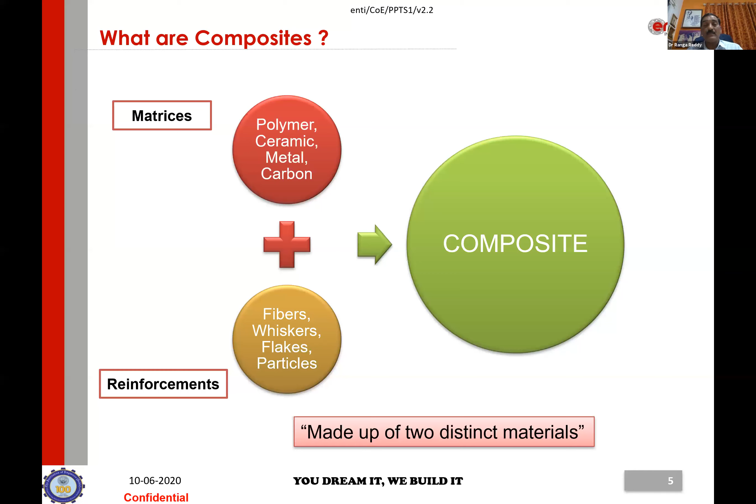What are composite materials? They are solid materials constituted by two or more distinct phases, and their physical properties are different and better than the individual material characteristics. A composite is designed to match high stiffness and brittleness with a tough but less stiff matrix, and it acquires high resistance to fracture and fatigue loads.

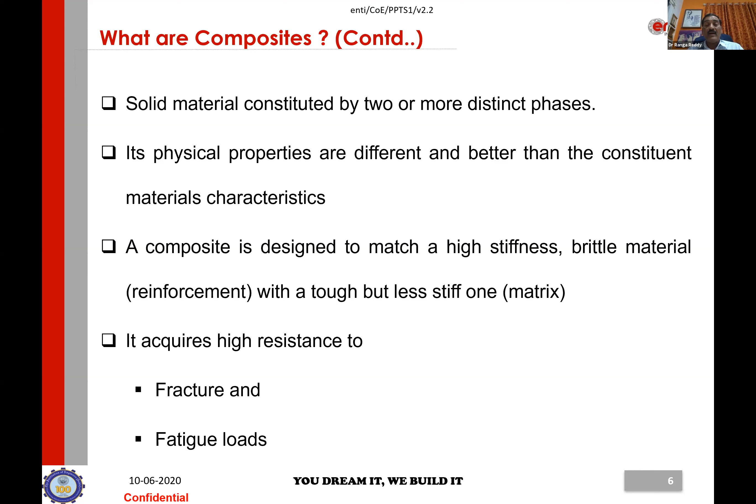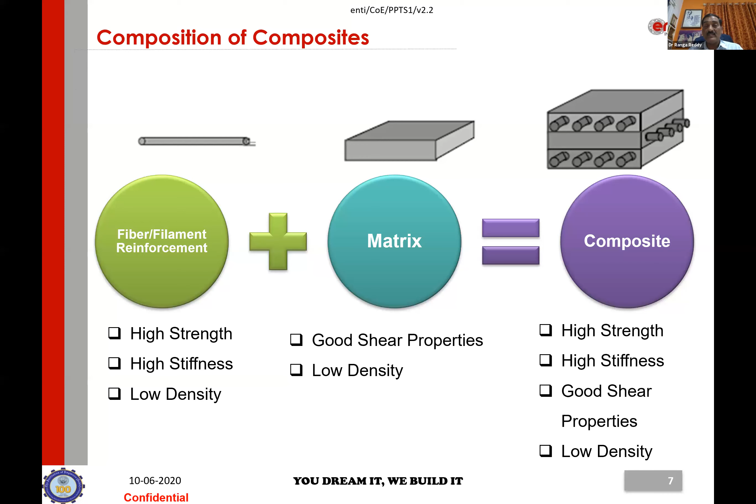Looking at the characteristics of the fiber — a filament reinforcement — it has high strength, high stiffness, and low density. The matrix has good shear properties and low density. When reinforcement and matrix are joined, you get a composite material with high strength, high stiffness, good shear properties, and very clearly, low density. This is one of the major advantages of composite materials, especially in the aerospace industry.

Why composites? These are used in different forms across so many industries and applications, in India and abroad. One major advantage is their tailorable physical properties, which are very distinctive for composites and not possible with ferrous or non-ferrous materials.

This is one reason designers are fond of designing products using composites—thermal management, heat transfer, and strength and stiffness at low densities. This is another advantage, especially for aerospace applications where weight matters a lot. Conductivity range is very low to many times that of copper, and thermal expansion is almost close to zero, covering a wide range of materials.

In composites we have polymeric, metallic, or ceramic, and carbon materials. The exploding potential of materials and applications is one advantage of composites. The primary advantage of composites over metals is that properties can vary with direction—this is another basic advantage, as properties can vary according to what the designer wants.

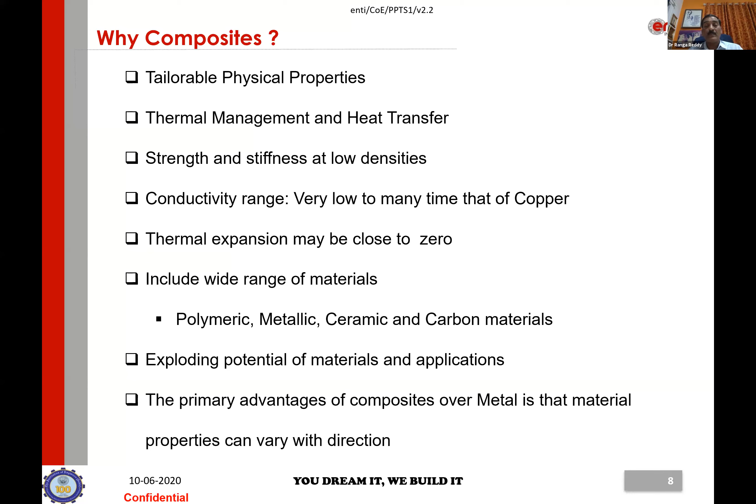Continuing on why composites: many structures have a primary load direction while other directions are less heavily loaded, but metals are isotropic. As our delegates and participants know, stiffness, strength, thermal expansion, and thermal conductivity are the same in all directions for metals. This is a key point where material properties at different directions vary in composites.

Composites are anisotropic, and the layups are tailored to provide as much strength as needed in whichever direction you want. The strength or stiffness in secondary load directions may not be the same as in the primary load directions.

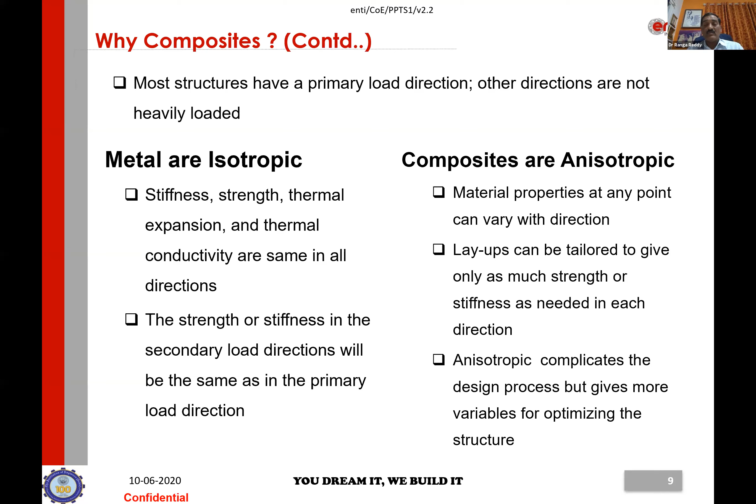As I said, being anisotropic complicates the design process but gives more variables for optimizing the structure. The benefits of composites are plenty—I've just recorded a few of the most prominent ones.

Better performance, lightweight—especially important in aerospace and space applications—lower energy consumption, fewer greenhouse gas emissions, extended life cycle, and improved constructability with low field installation cost, especially for composite parts, since the number of parts becomes much less when using different methods, especially in aerospace applications.

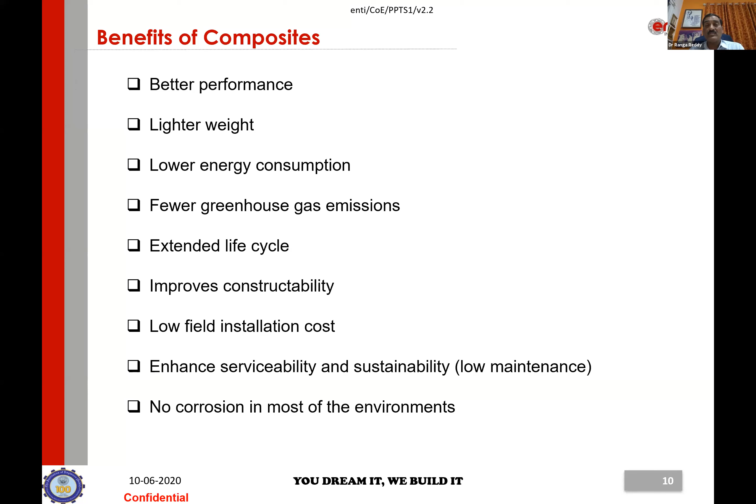Enhanced serviceability and sustainability—if you consider longer life, low maintenance cost, and no corrosion, these are very clear advantages, especially in marine applications. No corrosion is a very interesting and useful pattern for composite materials in most applications.

As I said, regarding the materials we are discussing, we will not go into full details of the subject because in 45 minutes we would like to give an overall view of the materials. Let me mention what is normally used in aerospace applications.

Normally, materials consist of a matrix. The matrix sets up the part geometrically, gives cohesion to the material. It is usually flexible and not very resistant, and it transmits efforts from one fiber to another. The reinforcement, as we have seen, provides rigidity and resistance.

The types of matrices are plenty; we've mentioned a few used in aerospace and other industry applications: metal matrix composite materials, ceramic matrix composite materials, and organic or polymeric reinforced plastic matrix composite materials.

Coming to fibers, the main fibers used in reinforcements are glass fibers, which form the largest part of applications in other industries including even some aerospace sectors. Carbon fibers are highly used, especially in high-temperature areas and aerospace applications. There are also boron fibers, ceramic fibers, and metal fibers.

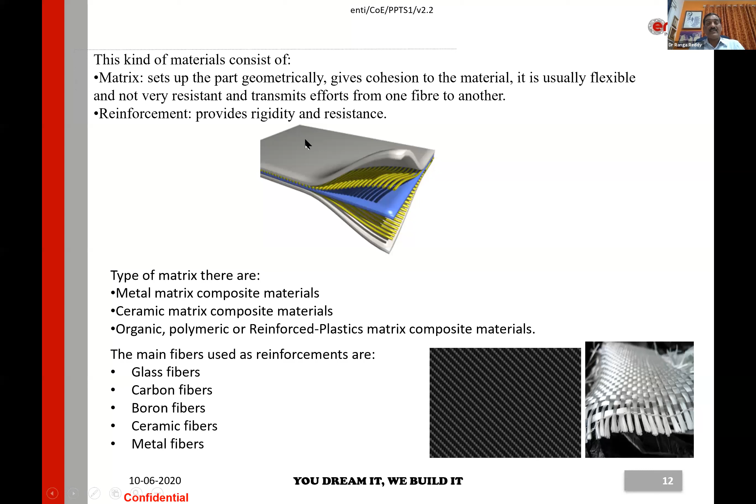Sharing of slide. Ramdas, I'm not able to move the slides. Try it, it's your control only. Yeah, I think I got it there.

Generally, most of the time when the usage of composites comes up, the cost of composites will be higher compared to other materials, especially in applications where it is required. But whenever we calculate the cost of any product or application, a total life cycle cost analysis has to be done. Then we can make the cost comparison with other materials.

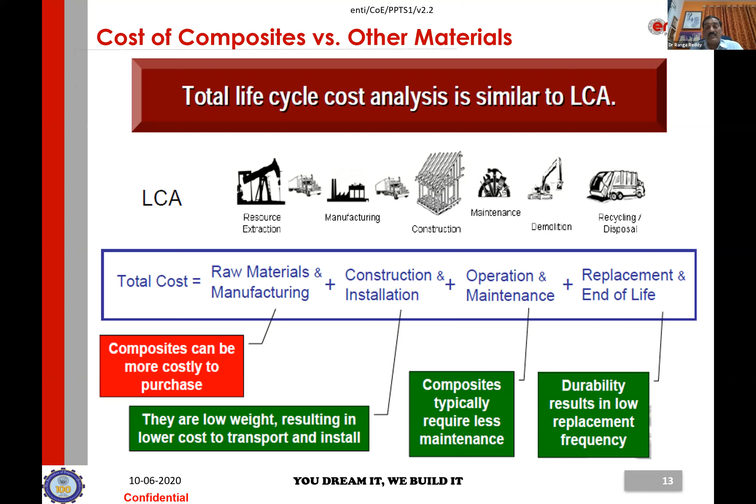If you take this total cost and compare composites normally, the only area where composites are more costly is raw materials and manufacturing cost, which is high compared to other materials. But for construction and installation, the low weight results in low cost to transport and install. Composites typically require less maintenance, and their durability results in low replacement frequency. This shows that composites are competitive in total life cycle cost compared to other materials used in aerospace applications.

This slide is to show the total application of composites manufacturing growth in India, from 2000 to 2020. If you take the world GDP, in 2000 the BRIC nations were around 11%.

Developed countries were around 89% of the GDP in 2000, and the BRICS nations' share of GDP grew to 40-60% over time. This is in comparison to composite production as well.

This gives a relativity that production of composites goes along with GDP growth. If you take BRIC nations, in 2000 we were producing only 19% of world composite production, and 81% was developed countries. BRIC stands for Brazil, Russia, India, and China - this is called developing countries, though maybe one country has already claimed developed status, but still all four are considered developing countries.

Now in 2020, BRIC nations' composite production has gone up to 37%, and developed countries' share has come down to 63%. This shows that developing nations overall have taken a strong role in global composites production, and further BRIC country increases are not a matter of whether it will happen, but when and how much. This shows clearly that developing countries, especially India, are catching up in usage of composite materials across different industries.

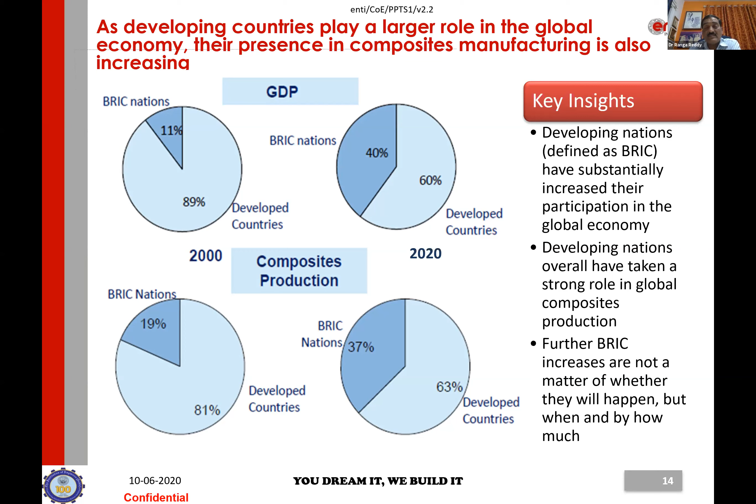This is the global demand for carbon fiber, taken from a magazine. It goes from almost 29,000 tons carbon fiber usage, now expected to be 73,000 tons in 2020, projected at almost 40-45% growth. This is because the applications, cost of manufacturing, and technologies are becoming more affordable day by day, so applications of composite materials in every sector are increasing.

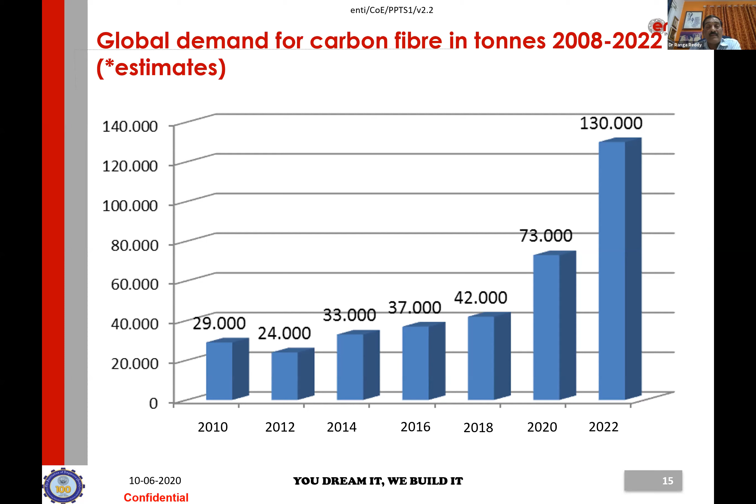The usage in aerospace industry is something I'd like to highlight, particularly Indian applications, since after my M.Tech I joined this project in 1986 through campus recruitment. This was every Indian scientist and defense scientist's dream project. Whatever we discuss about this LCA, the press coverage, and the time taken, it is one of the wonderful indigenous first projects done by Indian scientists.

One of my directors, Dr. Shamrao, was part of it as a participant, and I believe he is the person who has worked on composites from the inception of the LCA project up to now. Interestingly, Tejas is the name of the light combat aircraft - initially it was called 'light combat' because composites were used for almost 45% by weight, mostly carbon fiber, with glass and aramid also used in this prestigious Indian project.

An interesting fact for our Tamil Nadu audience - at Sulur Air Base, LCA or Tejas flights are stationed and are war-ready now. All the training has been done, and it has been handed over to the Indian Air Force, with the base located at Sulur, Tamil Nadu. This is the LCA frame showing the composites used on it.

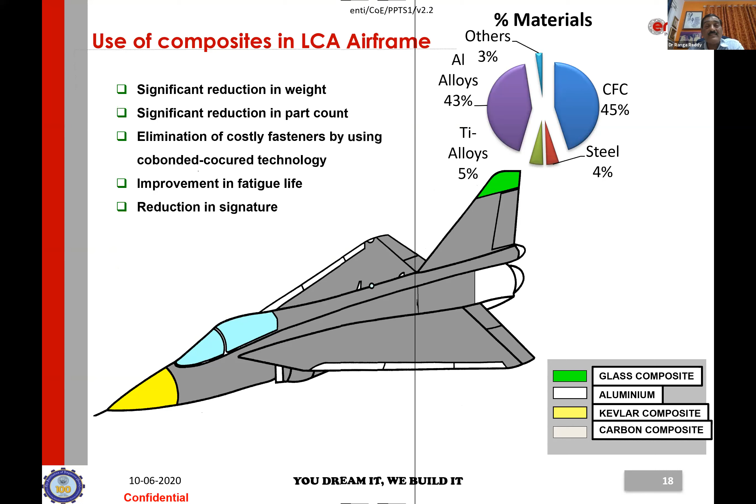This is a typical way composites are used in most parts of fighter aircraft now. If you see the wing, it uses the same co-bonded fiber composites. And if you go to the canopy windscreen, there's a tapered 3D curve single piece and electric demist film. The radome and center fuselage use honeycomb panels for moisture prevention.

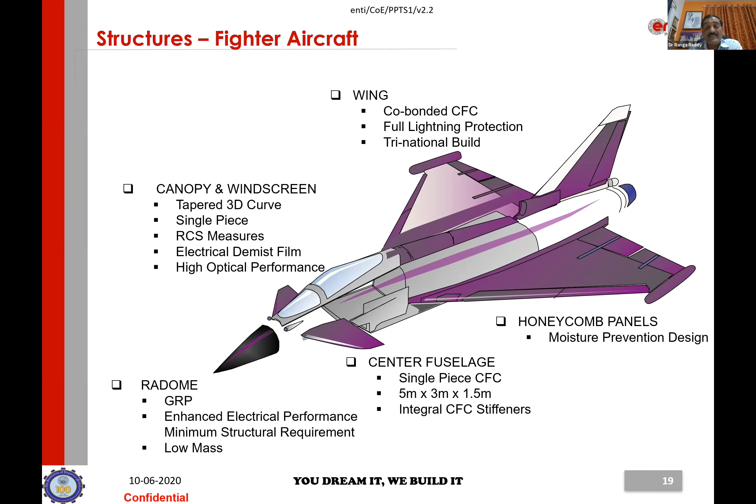This is the Eurofighter, done as a combined project by most of the European countries to produce this fighter aircraft. This aircraft is not produced by a single country, but remember what we were talking about earlier - Tejas is a production of our own, one country developed the project, and it is in service in our Air Force.

Another project, though maybe not in general public usage, is our pilotless target aircraft, generally called unmanned aircraft. This is done by DRDO Bangalore, and it is called Lakshya, or PTA. All the glass composites are used in the entire structure, and the method used is a wet layup method, which is a very inexpensive process. These materials are regularly produced for our defense applications from the DRDO lab in Bangalore.

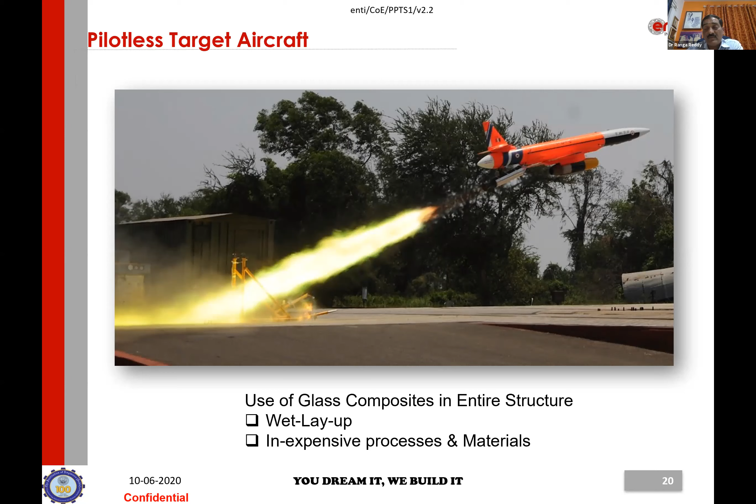This is another very prestigious project done by NAL, another Bangalore-based CSIR lab - an all-composite aircraft using glass composites in the entire structure. This again uses the wet layup method, and JAR certification has been done. It is in service for training clubs in India, used for training pilots in most training clubs.

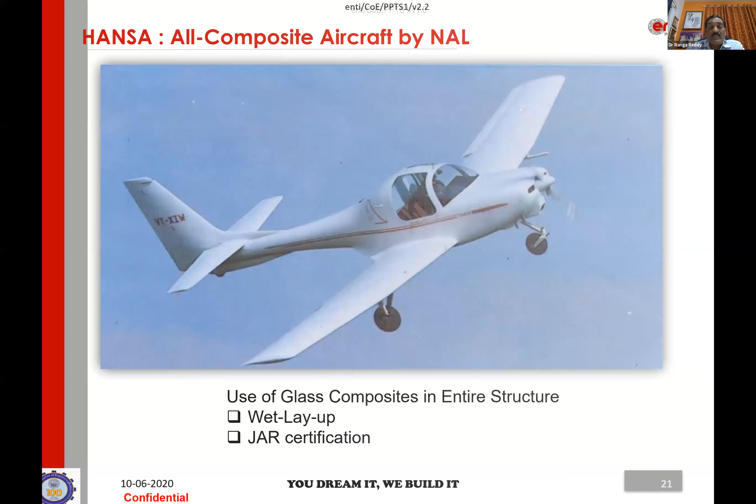This is another Indian prestigious rotary wing project, initially named ALH - Advanced Light Helicopter - and now called Dhruv. Here the composites make up 60% of the wetted area and around 40% by weight. Most of these materials are Kevlar composites, and this again is a proud product of Bangalore-based Hindustan Aeronautics Limited.

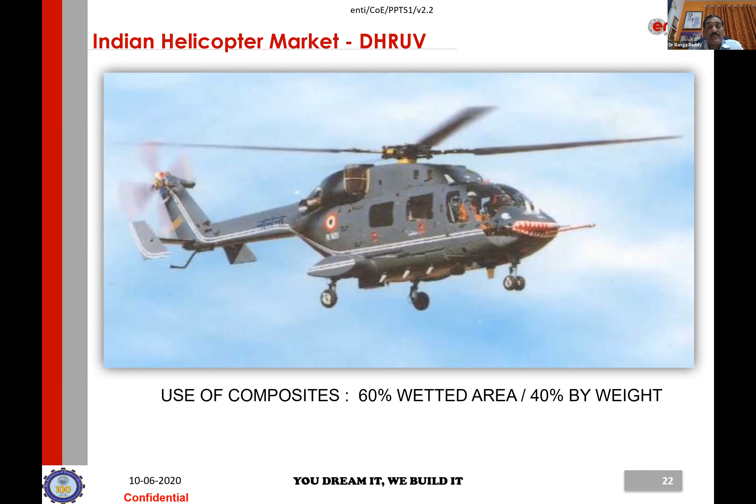If we just take the overall aerospace defense applications of composite materials, in civil and military aircraft approximately 50% of the airframe is made from composites. I think our LCA comes around 45%, and for Boeing projects it has gone up to 60% for the AH-66 aircraft, and it's applicable in B-2 bombers, Gripen fighters, and civil aircraft.

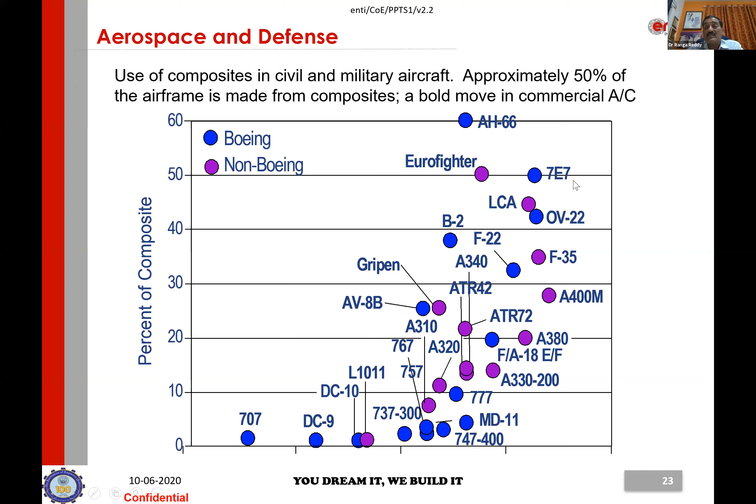Most present-day products from Airbus or Boeing in civilian airlines use very large amounts of composites - almost 50% of the airframe, mostly carbon fiber composites. This is the way the future goes - initially it was around 4 to 5% in the DC-9, 737-300, or 777 aircraft. Now it has grown with the 7E7 to almost 50%, with 60% of that civil aircraft's composites used in airframe applications.

Most of the time we talk as if composites are only meant for aerospace applications. But if you really go through the applications, I think there is no industry left without usage of composites, whether it is glass, Kevlar, or carbon fiber.

And if it is one of the aerospace applications, what we are just seeing here. But if we go to an automobile, I think this is another area which is picking up very high level applications. It is there in automobiles, construction doors, windows, and even internal beams. Most of these places, composites are getting used.

And wind turbines, I think there's a maximum consumption of material goes for wind turbine blades and the energy area, a lot of composite material usage is done. Sports, especially sports vehicles and very lightweight cycles, are made with carbon fiber and other composite materials. Medical equipment, composites are used. Oil and gas industries, all tubes and pipes where critical chemical reaction products are made, use composite, especially carbon fiber with filament winding application.

Marine applications have been there for years together, mostly using glass fiber layup methods. Energy and power industries, most applications there are composites. Robotics for lightweight applications, and railways. I think nowadays railways are picking up the most usage of composites.

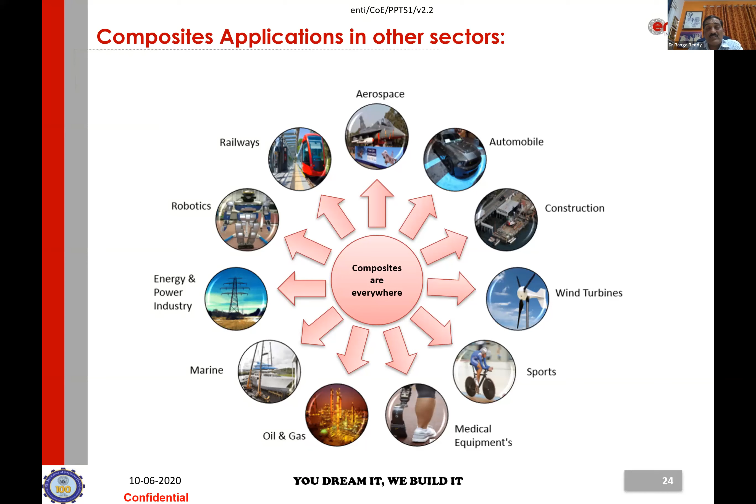This slide just mentions that composites are used in every industry. There is not an industry left out without usage of composite materials. And especially in the railways, I think you know it is the lightweight factor where composites come in.

Trains, the challenge is they are very heavy, and there is tremendous scope to exploit the benefits of lightweighting. In a lot of calculations, 1 kg of weight reduced in space applications has a thumb rule that the fuel and cost saving is almost equal to 1 kg of gold. Space scientists will accept when you say 1 kg of weight is reduced in the launch vehicle, how much cost saving comes from that.

And on the ground too, there will be a lot of cost savings, especially when you reduce weight. Energy savings will come, cost and infrastructure management will become easy, and capacities can be increased. Another challenge is less damage to the track, and the need to overcome both technical and cultural barriers to introduce lightweight materials more widely.

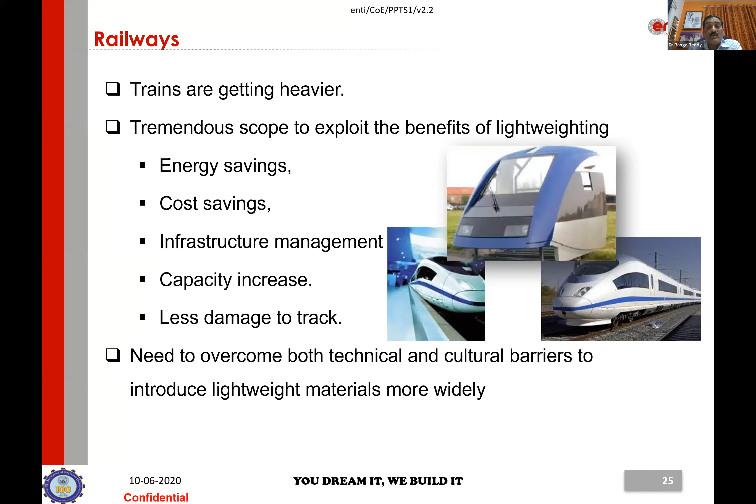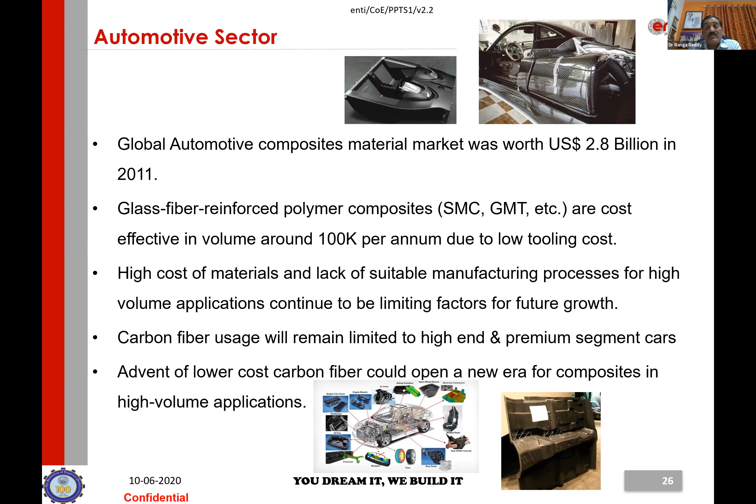In the automotive sector, the application of glass fiber reinforced polymer composites is slowly picking up, and the high cost of materials is taking a little more time to get into automobiles. But now a lot of technologies are coming forward, and the cost is coming down. In automobiles we also see a jump in composite usage, especially carbon fibers used in race cars, where weight reduction is crucial to run at speeds of around 300-400 kilometers per hour.

And oil and gas, which I was mentioning, the oil industry uses composite materials, and the mass of construction is reduced up to 80%. This is one of the latest developments, where even government rules state that anything going underground, especially for gas, oil, or any fluids, must use composite pipes, because that will last a lifelong, with no leakages and no accidents of fire that we are seeing now and then.

Use of carbon fiber reinforcement elements has become very important for the oil industry due to high specific strength, which is the most important requirement when pressure fluids are pumped through, giving a longer lifetime structure. For example, over 25 years, carbon fibers lose only 2 to 10% of their initial strength, meaning carbon fiber pipes or tubes can last in the ground for many years. There's also easy installation for construction, and we can make joints, whereas mechanical joints have a lot of challenges with leakages.

We can build in the co-bonded and co-curing system, as all the joints can be made as a single structure, and it gives higher safety at work and minimum maintenance.

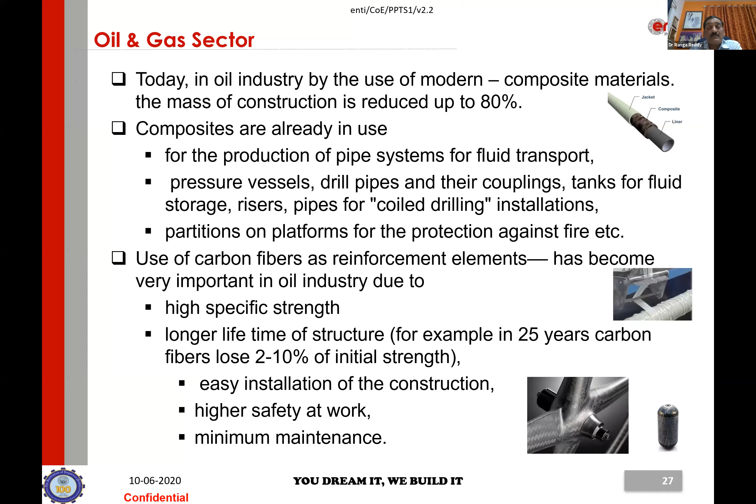And composite is the major topic most of the time whenever we talk to academicians or even industry people, they ask where and how many industries and applications are there for composite materials in India.

So we made a lot of effort to find out how many industries are public sector and private sector. I made a group especially in aerospace and defense sector. In public sector you may know all these people are using composites like HAL Bangalore, Kanpur, Nasik, ADE, NAL, DARE Bangalore, Hyderabad, DRDL, GTRE.

This information is specially meant for people who are looking for opportunities in composite industries, and maybe especially for academicians, to show the future of composite industries in India, and how many are already looking for trained people who know composite manufacturing technologies.

And if you see the logo here, Infosys - people may wonder why Infosys in composites? I think to a very large extent, my Dr. Shamrao can correct me, around 300 to 400 engineers in Infosys work in design projects of aircraft composite components. That is the opportunity for people who know composite knowledge.

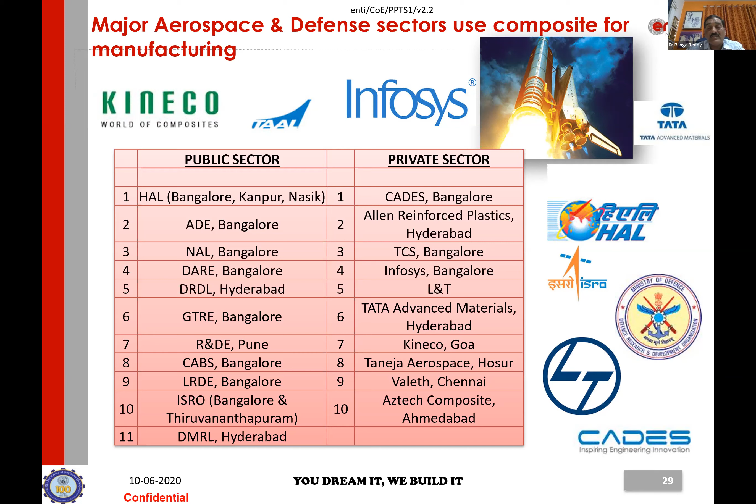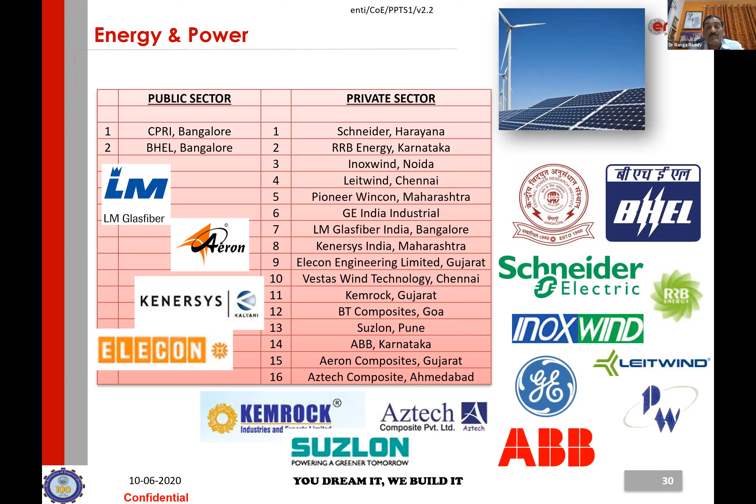Who are in the energy and power sector, in composite industries, looking for composite technologies, looking for better technologies in the composite world, and skilled manpower and engineers who can come and be part of these industries.

This issue has come up because Innovation has participated in Composite India shows around Delhi and Mumbai, and 3 times in Hyderabad. All these industries were participating in the composite exhibition, and everybody looks for skilled manpower and skilled designers who have knowledge in the composite field to help their industries.

And if you go to sports and medical, no public sector is there - private sector: Kineco, Diana, and Kemrock, GE India, L&T Mumbai, Mahindra Pune, Kineco Goa, and Eternus India Maharashtra.

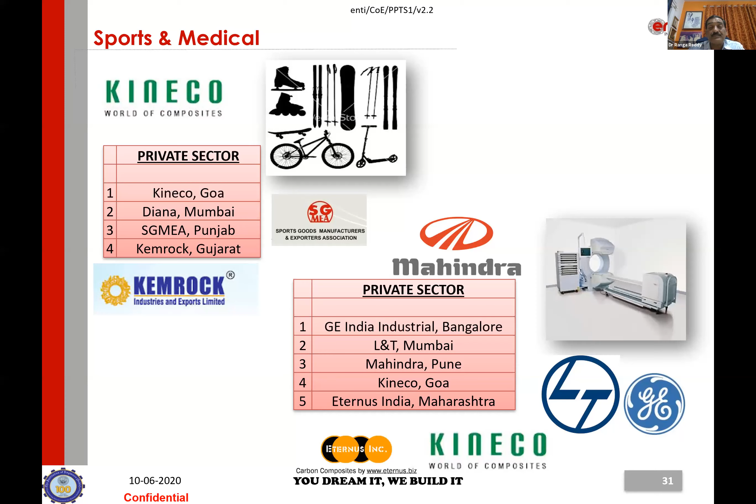And automobile - every automobile industry, overseas or Indian. If you go to railways - Indian Railways, even BEML is using composites a lot for their military application vehicles, and DRDO was using them for CVRDE battle tank applications, where ballistic carbon fibers are used there.

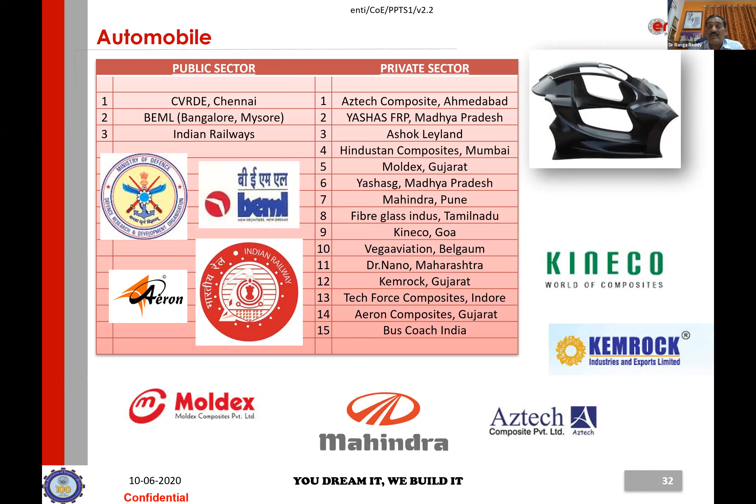BEML, Bangalore and Mysore. And in private sector: Aztech Composite and FRP Madhya Pradesh, Yashasg Madhya Pradesh, Fiberglass Industries Tamil Nadu and Maharashtra, Kemrock, Tech Force Composites Indore, Aeron Composites Gujarat, Bus Coach India.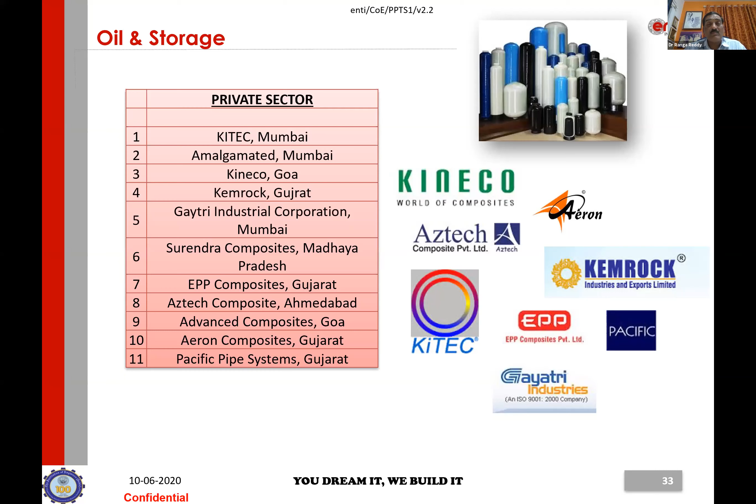And oil and storage - all the private sector industries are used, almost around 11 oil and storage applications, all the industries are there using composite materials and composite applications.

These applications cover many industries and sectors, both public and private. Normally these are the application manufacturing methods used in different industry patterns.

This is a very well-known system, the hand layup method. I think this is the most basic method of fabrication for thermoset composites. The process involves laying prepreg plies onto the tool by hand. This is a system we've used for years together, these layup systems.

Looking at the whole industry and all applications, I can say around 80 to 85% of products at every industrial level, whether in energy, power, marine, aerospace, or sports, use the hand layup method, whether with advanced room temperature curing, oven curing, or autoclave curing. But the method of laying up, making the parts, making the molds and building the layup system is used very largely in every industry.

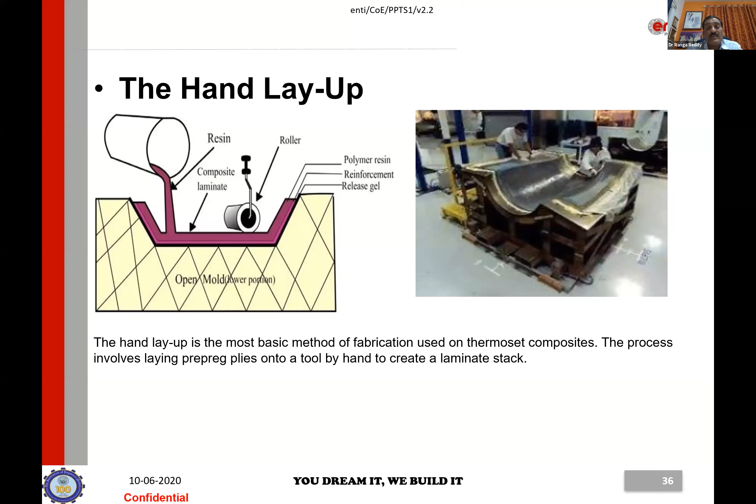Especially in the aerospace industry, the layup method is used very widely. Another system is vacuum assisted resin transfer molding. It does not need the use of heat or pressure, rather than pumping the resin using pressure, VARTM draws resin into the preform using a vacuum. Thus VARTM uses low cost tools, making it easy to produce a considerable amount of inexpensive and complex parts.

Presently our company is involved in an unmanned air vehicle for a DRDO lab in Bangalore, and this unmanned air vehicle is almost 4 meters square, a bigger one, and these parts are done using this method. Vacuum assisted resin transfer molding method is used, and all the parts are produced with this.

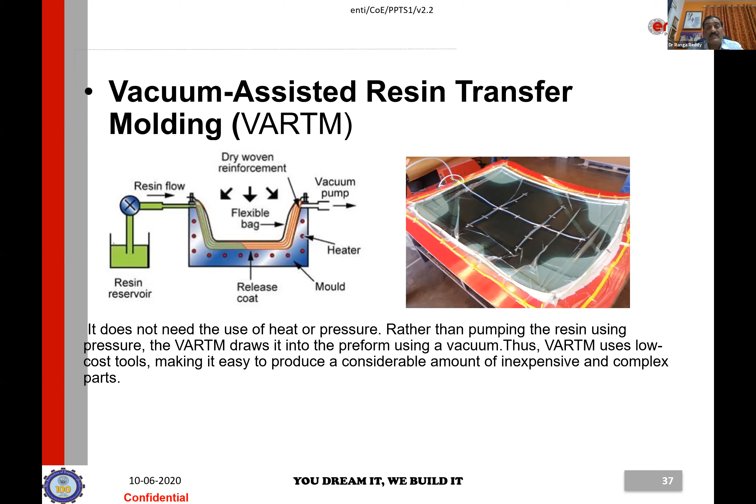This is filament winding, as used for tubes and pipes. This is a system that is very long-established, and rotating mandrels are used in the pipe systems. These are only to show how many methods of manufacturing systems exist for composite parts across different industry applications.

This part we use in radome systems, some of the applications there in domes were done this way. The significant advantage of the filament winding fabrication method is that its material costs are low, and the process is continuous and can be highly automated.

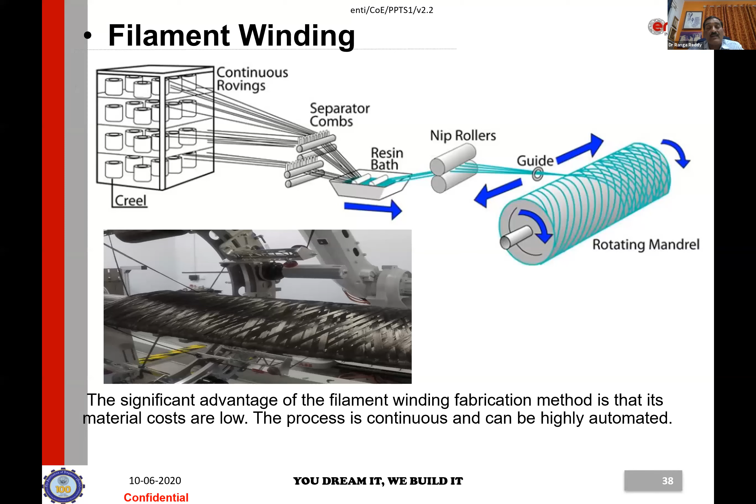And pultrusion, these are general applications we see now in very continuous production processes. Most applications involve fibers pulled from a creel through a resin bath and then through a heated die. The die completes the impregnation of the fiber, controls the resin content, and cures the material into its final shape as it passes through the die.

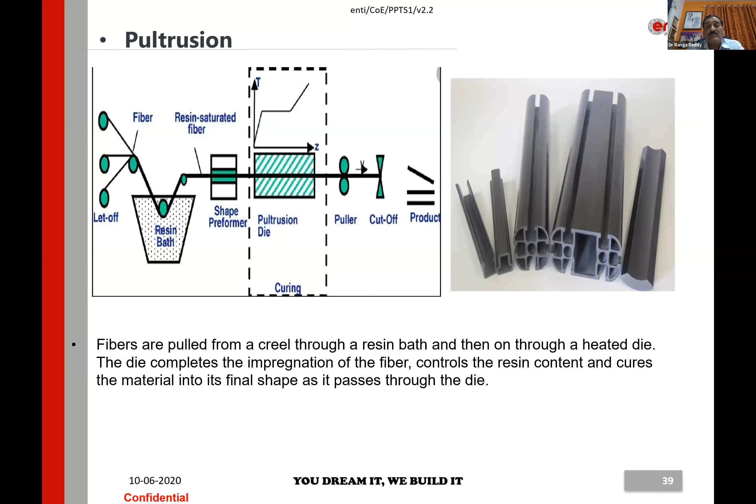You can see the applications are plenty, like ladders and similar items. This is produced in a very fast method in large numbers, and the cost comes down. This is used for most structural applications, not in aerospace applications, but other normal engineering applications.

Aerospace industry manufacturing methods, I think this is the one we would like to spend a little time on, because more than 80-90% of the parts are used here. This is an autoclave application, which is nothing but a layup process, which we were discussing on the other side.

The layup was used in the previous applications. We do a layup and room temperature curing is done in the mold. Then, in the next extension level, the layup is done, and then you put a vacuum bagging, and it cures with resin and vacuum bagging. Some products will be produced this way.

In the autoclave, the prepregs are laid up and kept on the mold. Vacuum bagging is used for the products, and there will also be external pressure applied. These are all the applications.

In the LCA, I think most of the parts, whether fin, rudder parts, or wing and fuselage components, are made using the autoclave system. In HAL we have an autoclave of almost 6 meters diameter, the biggest one. In Bangalore, even Tata has more than 10 autoclaves to produce all these aerospace components.

This is a system where we say layup process, but this is not a normal layup process that is required. There is a procedure to tell how prepregs are used, and how each layer is kept as per the design.

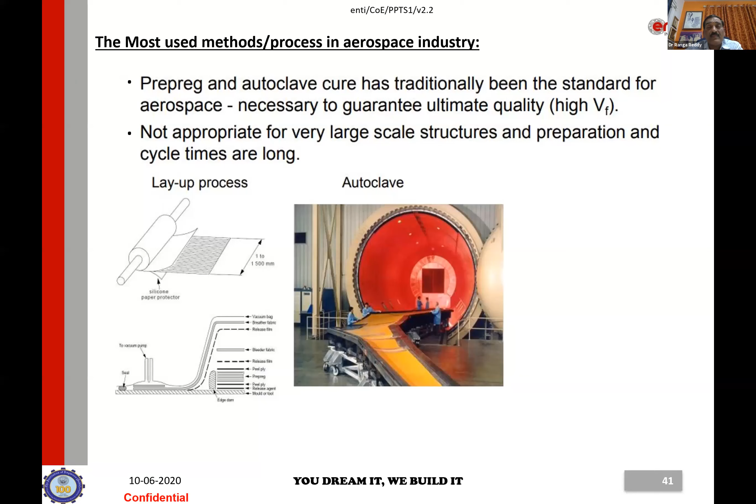This autoclave process goes into detail - it involves laying up a dry fabric with introduction of resin. But nowadays, most aerospace applications use pre-pregs. In pre-pregs the resin is already impregnated and can be directly used, so no additional resin pumping is required.

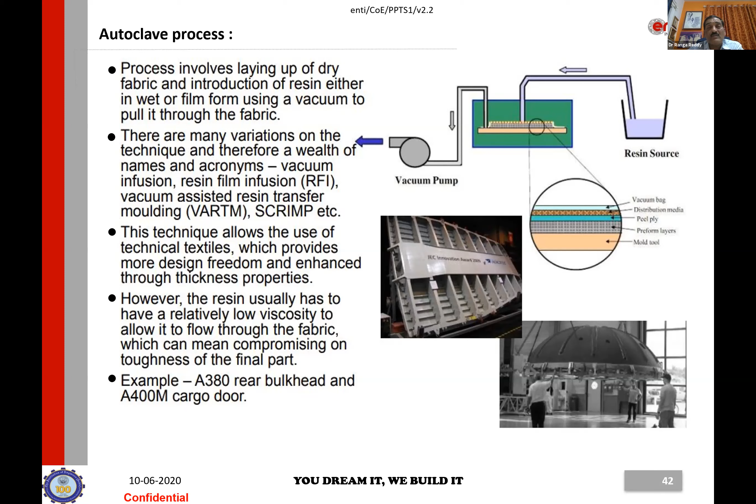As I explained, most of the parts, like the example photo we have shown here, the A380 rear bulkhead and A400M cargo door, are manufactured using the autoclave method for aerospace applications.

For another 10 minutes, or 5 minutes, I'll just explain the relation of innovation to the composite industries applications. I would like to take a few minutes for this.

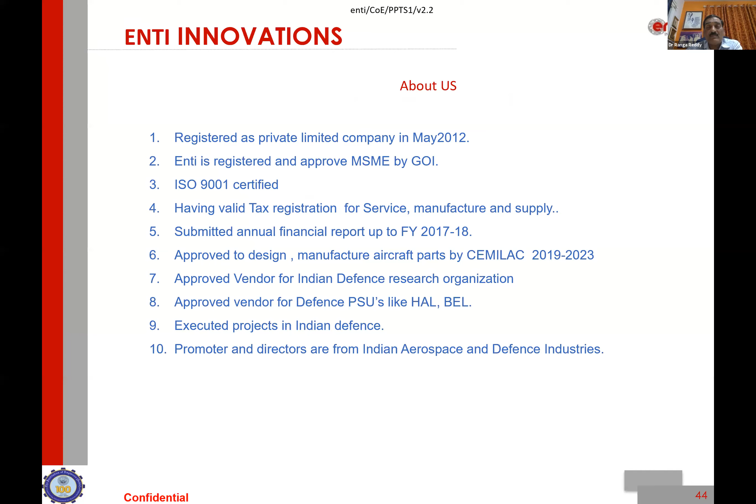This innovation was founded by industry experts, with more than 100 person-years of combined industry experience. As I already told, my other director, Dr. N. Shama Rao, is also participating in this - he's attending - and another director, V. Swaminathan, is also a part of our webinar. They have worked for years, almost serving around 100 person-years of combined experience.

We want to do this especially to meet the skill gap between industry and academia, and how to build skills to match industry requirements. That's where this composite laboratory concept was taken from the innovation side, specifically to bridge the gap between academia and industry.

People who have produced this, their whole life is dedicated - especially Dr. Shama Rao, who was built on his 45 years of experience, especially in composites from glass cloth to carbon fiber, from room temperature to almost 300 to 350 centigrade applications of carbon products, including for GTRE engine products.

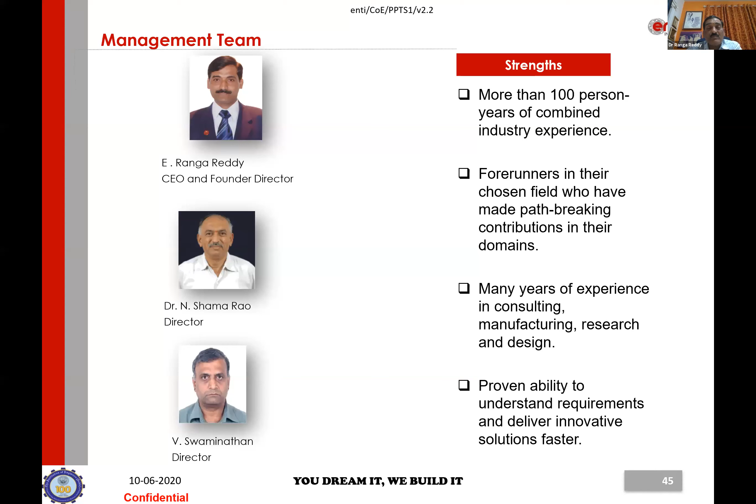Our advisory team is well established on the academy side - it includes Padma Shri Vasagam, who is Vice Chancellor of Anna University, and he is also our council member and NAL director. These are all people with vision and ideas.

This is the latest upcoming industry - composites - and it is the future in every engineering sector; composites will be used very widely. But in our courses, our engineering side, wherever we get manpower, we see a tremendous lack of knowledge especially in the manufacturing sector of parts. There may be theoretical classes, but no engineering institutes or other places provide exposure for people looking at careers in composites, and industries are looking for somebody who can get trained outside or trained at their institutes before they come into industry - it will be an upcoming industry in composites.

That's where we thought we would bridge the gap by giving trainings and establishing laboratories wherever it is - institutions, academia, or industries.

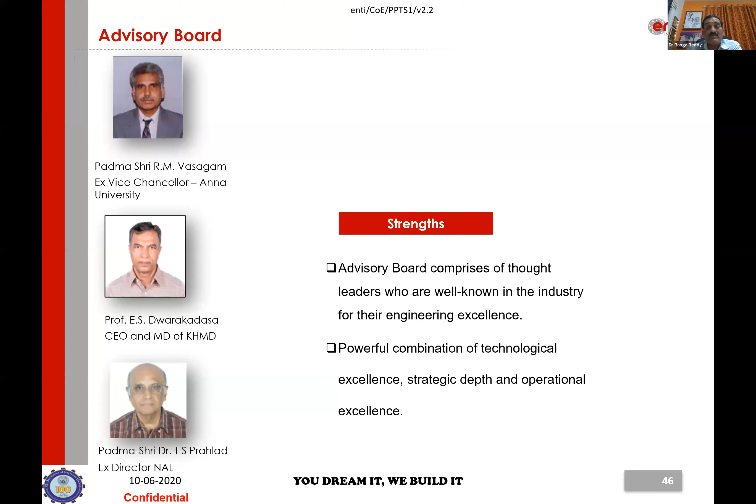We can start the training at a basic level and they can be inducted directly into the composite industries, where there is a lack of trained manpower, which all industries are facing, especially in the composite fields. Enti is doing engineering services, and these are the products we've been doing for the last 8 years.

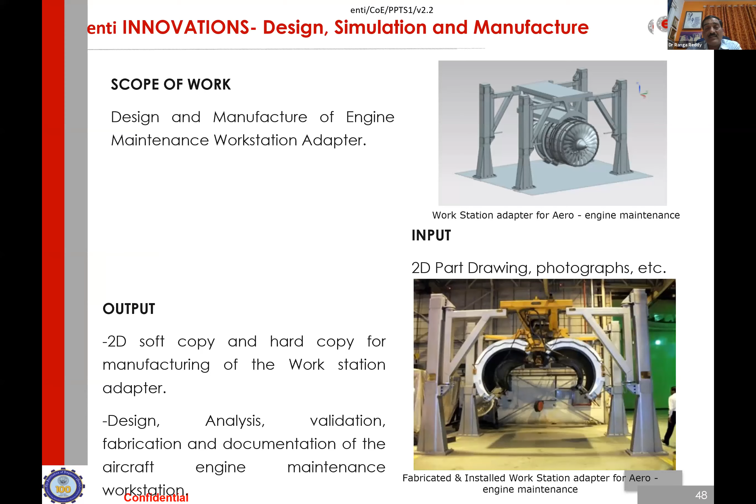We do reverse engineering, producing parts for import substitution projects we have done, serving the biggest design of our GSLV Mark III, including design and manufacturing of aerospace structural assemblies. This is the biggest structure built so far out of HAL, around 4 meters in diameter.

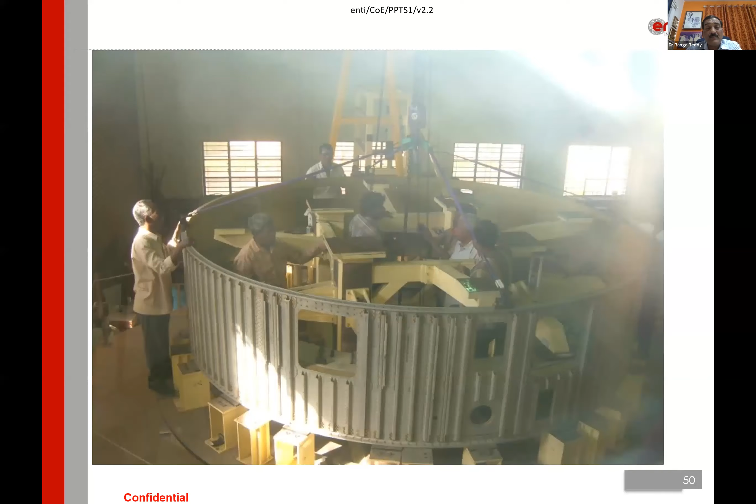All this tooling is designed and manufactured, including the component assembly, done at our place. And the innovation center, which I was telling you about, the composite center of excellence, is where we thought skill gaps will be built. This is where the concept of center of excellence in composites has come from, and it can be used for training modules.

We can train students at the engineering level or after polytechnic courses, and this laboratory can provide solutions for industries where they do not have any research or documentation for their products, and we can develop prototypes there.

It will have a laboratory facility especially for academicians who want to do a PhD and research projects. Composites is one field with a lot of opportunities, especially for academicians who want to get their doctorates in the composite field. This composite center provides a lot of facilities.

With this, we can do a lot of projects, knowledge management, and especially intellectual properties—any technologies can be patented. Especially in India, there is a big gap in composites documentation. There is no data available for any industry, even in the aerospace industry.

I think Indian companies in defense, DRDO, and HAL are doing a lot of research and testing documentation for their applications. This is one area where the composite center of excellence can bridge the gap, and we can use it for that.

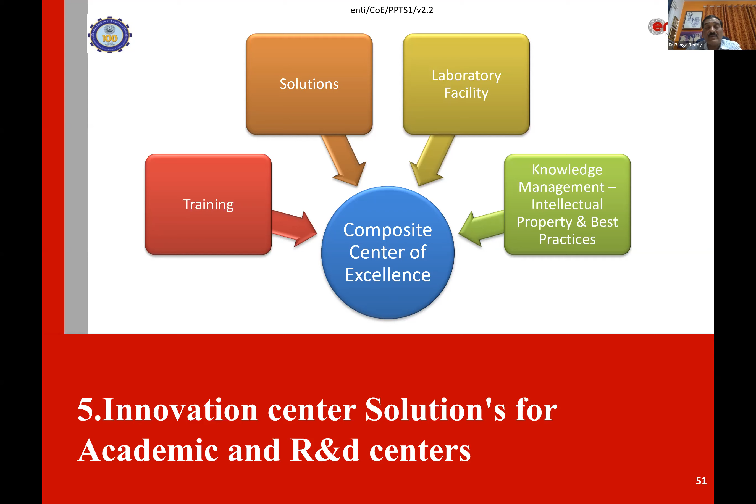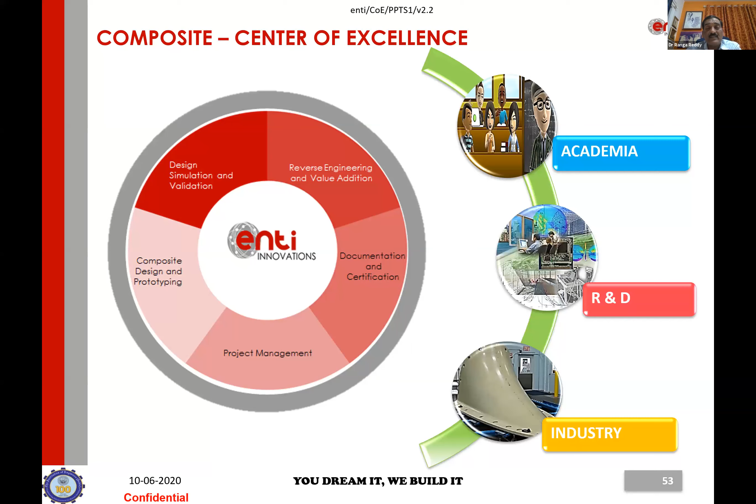The pathway to composite excellence, as I said, is the Enti solution of centers of excellence. This will link academia, R&D, and industry sectors. Academy can train students and do research with R&D centers, which will support industry.

As we were discussing, industry normally says graduates coming out do not have marketable skills, and especially in India, it has taken second place in manufacturing due to lack of interest among students in manufacturing skills. This is where now we say Make in India, Skill India, whatever the government is talking about—this is where we have to pick up.

Unless we have hands-on experience, especially in this sector, we cannot teach through webinars, or through screens and computer screens. Hands-on manufacturing skills have to be developed.

After the COVID challenges, India is hoping—and we might have seen in the press—that hundreds of manufacturing industries want to shift their base from our neighboring countries to our country. I think that gives a lot of opportunities for our manpower, upcoming engineering students, and other sectors to get their skills ready. This is an ongoing effort where hands-on training for all students will be done.

This is a comment from most of them. Academy says that lack of verifiable and consistent input from industry on their needs will never come, and there's a lack of exposure for students due to limited industry-sponsored projects.

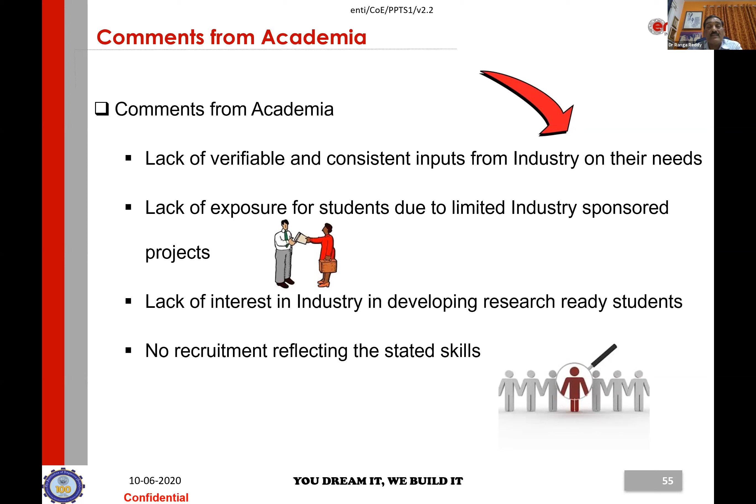I think now slowly we are linking industry and academia, but there's a lack of interest in industry in developing research-ready students, and no recruitment reflecting the stated skills. I think this gap exists on both sides—justifiable comments from the academy side, and equally from the industry side, as we heard.

This center of excellence wants to build a bridge between the expectations of industry and academy—strengthening areas to meet industry requirements. It will provide ISO 9001:2015 facility with all needed documentation and a lab certified by industry bodies, and a partnership that opens doors to industry projects with enti partner industries across the globe.

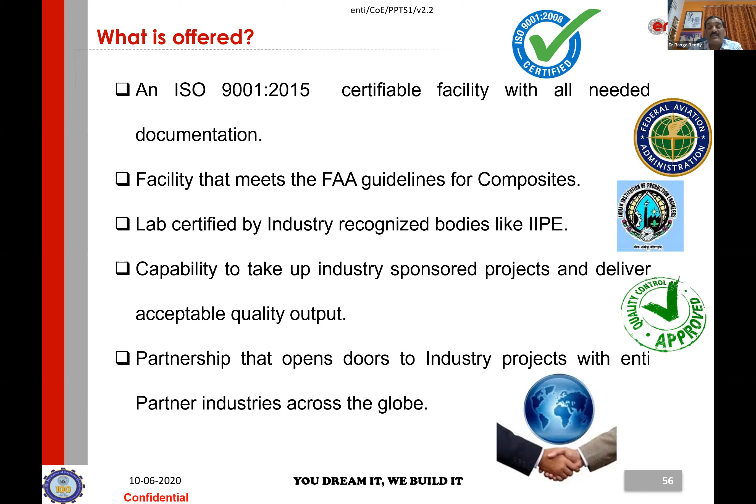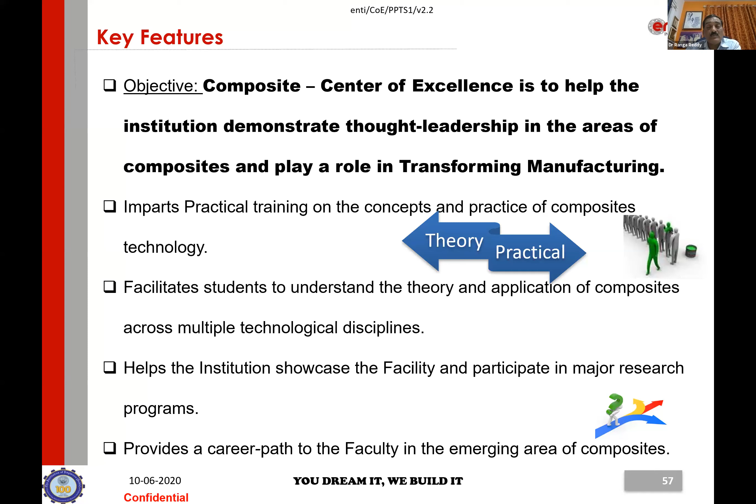This is especially the point where we can say the center of excellence at the institute demonstrates thought leadership in areas of composites and plays a role in transforming manufacturing. This is theory to practical. That's one area where most academicians and industry accept that we lack, especially in hands-on experience in most fields, but especially in composites it needs a higher level of that.

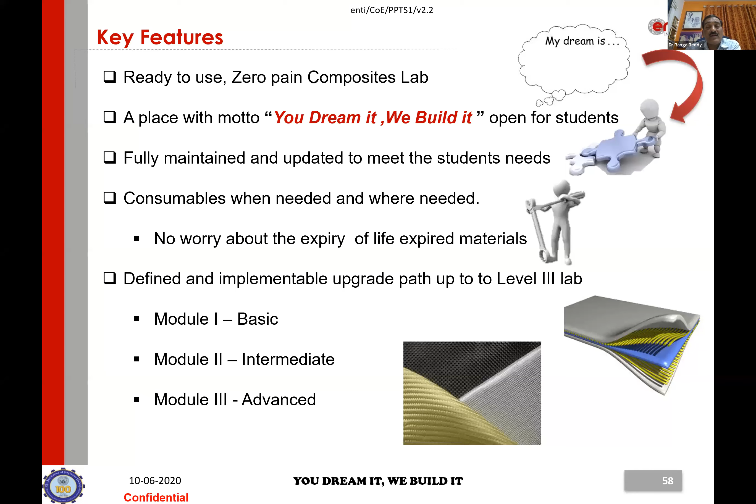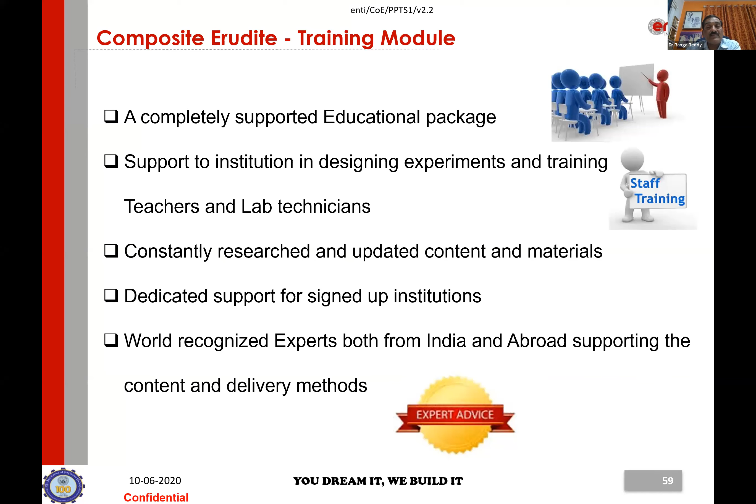This composite center of excellence will have all the basic facilities to do the composite lab. We can start from raw materials up to manufacturing components. We'll have training modules to teach from raw material to layup systems and safety systems, and we'll go for the component layer, including vacuum bagging, where parts can be produced. This center of excellence will have all the basic features done in Module 1.

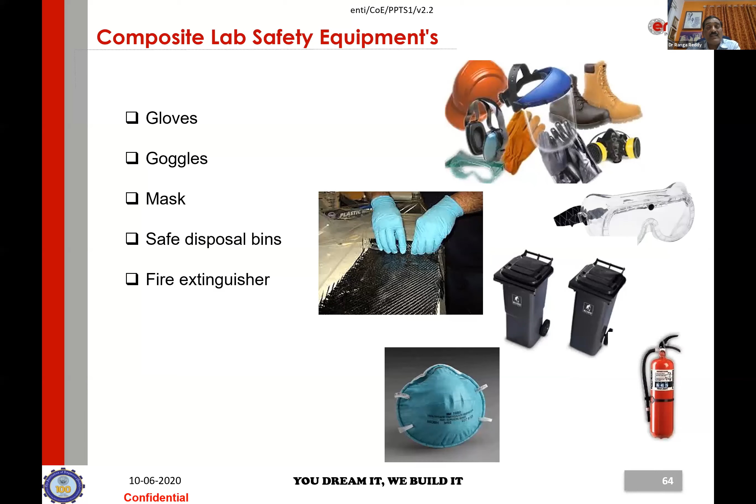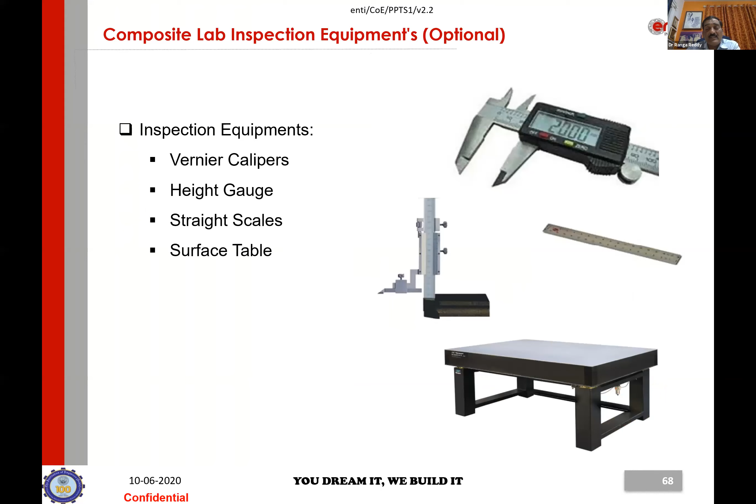We have all the facilities at the lesser level of a composite laboratory, and all the equipment will be part of this center of excellence. These are enough to produce parts required at a level size of 500 by 500, and all the special tools and special things will be part of the whole laboratory.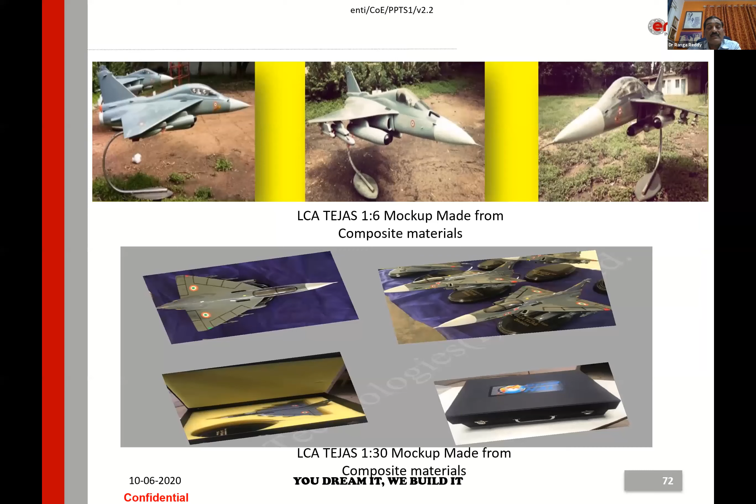These basic labs are used, and there's one in front of HAL corporate office - a 1:1 LCA, fully made of composite materials. It is almost 13 meters length and around 6 meters height, there for the last 4 years in front of HAL corporate office in Bangalore. These are all laboratory-produced products; the 1:1 Tejas and other scaled models can be used through the basic small laboratory modules we are offering.

The basic laboratory composite lab technologies are hand layup and vacuum bagging at room temperature. You can produce products like monolith, test coupons, curved panels, and these are industry-wise used in general engineering, civil, marine, and chemical storage units.

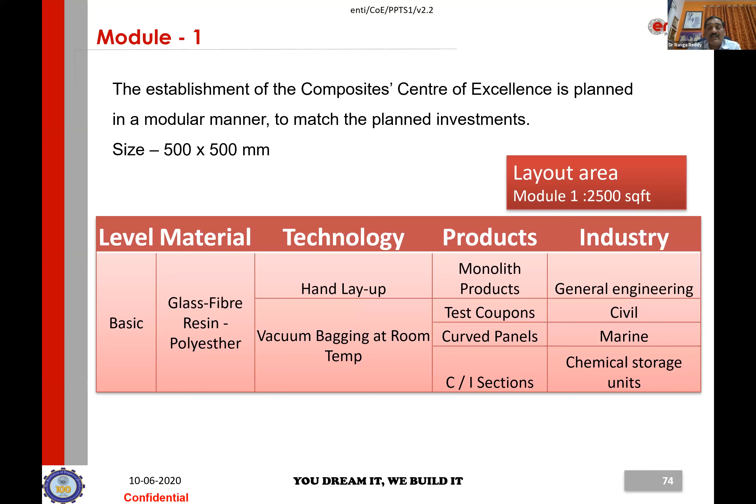The next level is intermediate. It involves materials up to basic level honeycomb cores, polyurethane foams, with technologies of hand layup and vacuum bagging with oven curing. Products can include sandwich panels, self-stiffened construction, CI sections. Industry-wise, you can use this for automotive production components, medical equipment, and marine industries.

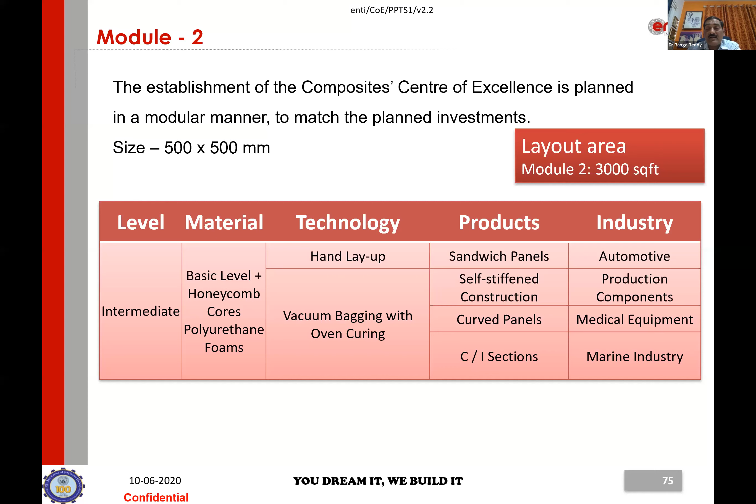The next one is advanced, especially for aerospace applications where you use prepregs of Kevlar and carbon. Technology-wise, autoclave curing and hand layup systems produce flat panels, curved panels, co-bonded and co-cured parts. Its applications are aerospace, military, space, skiing equipment, sports goods, and industrial products.

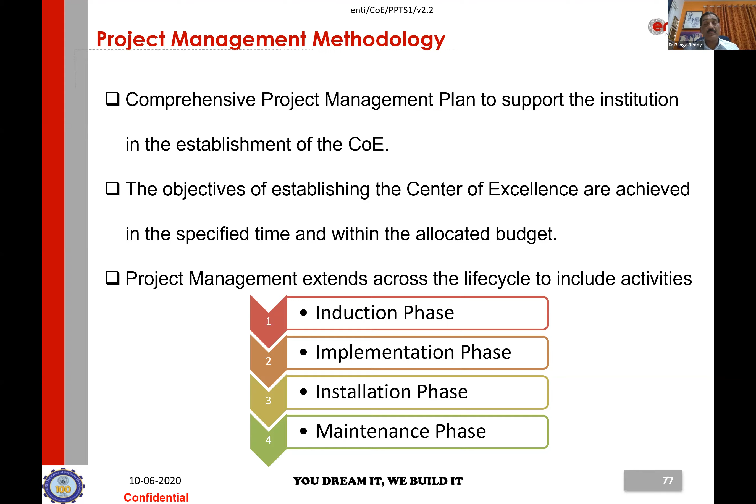These are all the induction phase, implementation, and installation. All the ENTI can give solutions in establishing centers of excellence at their respective institutes, academy, or industry level. I've already taken almost 50 minutes, Chairman, you have to excuse me - this is my last slide of the presentation, and if there are any questions from anybody, I can answer.

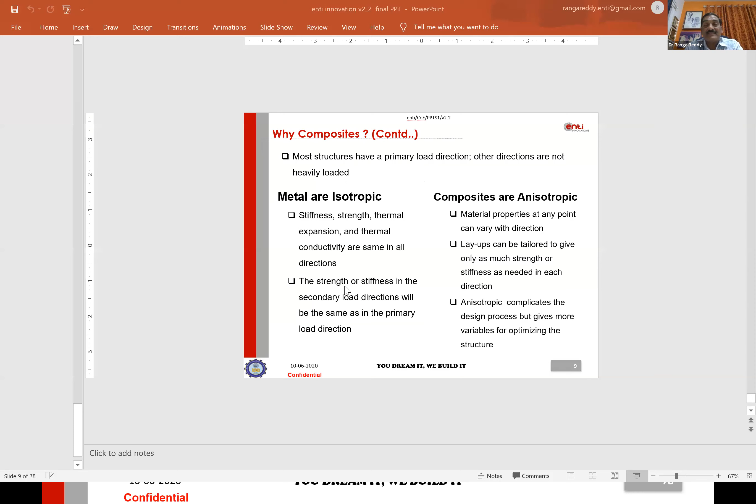Chairman, thank you. Chairman. Hello, thank you, Ranga Reddy sir. Please tell me, sir.

I think we have two questions. One is, sir, please discuss the application of FRP in civil engineering. I think especially in Bangalore we have a big institute, and all the doors and window panels, especially bathroom doors, and even on the construction side they are using glass fiber beams inside for strengthening purposes, especially for doors and panel boards - it's very highly used in the civil engineering process.

Then one more person, Mr. Thirumurugan asks: any measures taken for biofouling on glass fiber composite in sea surface applications? Sorry, I didn't hear that question - any measures taken for biofouling on glass fiber composite in sea surface application?